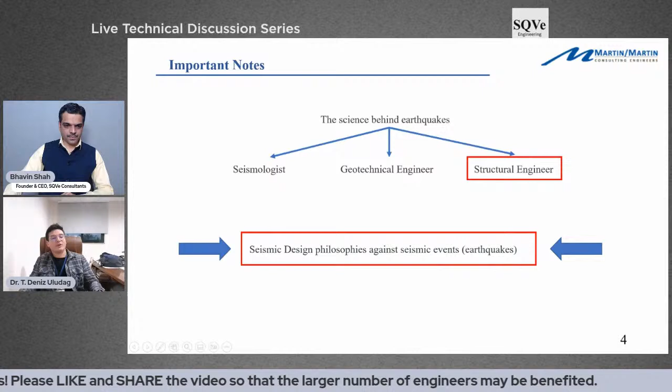And let's jump to important notes. I would like to mention that the science behind earthquakes is an ocean. It's not just one professional area. There are seismologists, geotechnical engineers, and structural engineers. Today we will focus on the structural engineering part, so we will discuss seismic design philosophies against seismic events. I can answer your questions briefly on seismology or geotechnical stuff, but I highly recommend asking questions on the superstructure above the ground. And that was the first important note.

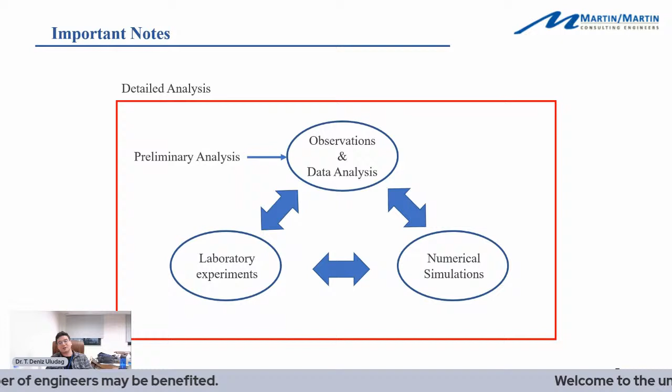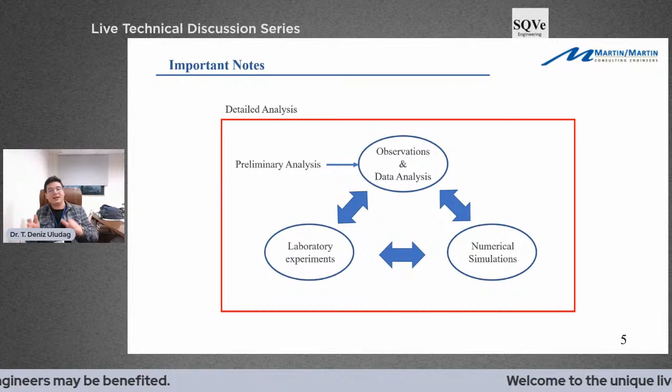And then the second one, we will discuss some collapses and damaged buildings here. But please do not forget that this is preliminary analysis. What I mean by preliminary analysis is these are based on observations, which might be based on images, videos, and pictures, or on what we observed in the field. But it's not the concrete outcome or concrete fact. So these comments might not be considered as a final conclusion.

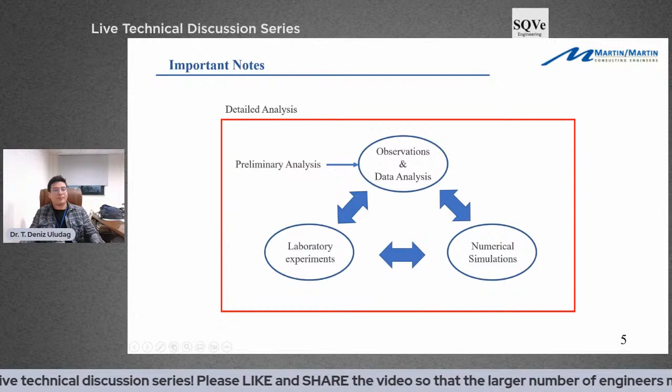So that's why I put the schema here. The final conclusion about what was wrong and what happened there will be provided after the detailed analysis. So again, today we will just talk about preliminary analysis. You can think of it as initial thoughts.

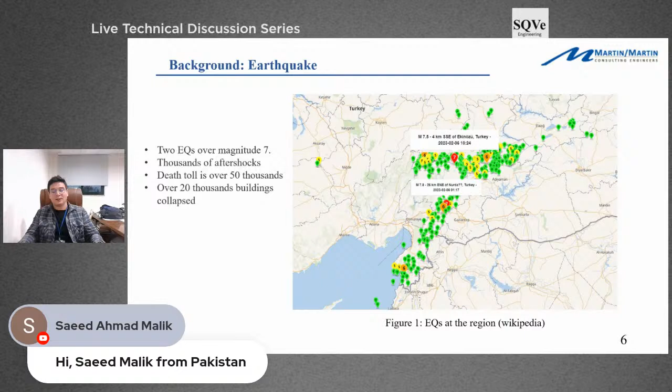So then let's start with the background. Our reconnaissance team stayed in Adana. You can see Adana here. And then we traveled every day to the affected regions in Turkey. We visited around 6 cities, not all of them, but tried to visit the most damaged ones.

So, brief information about what happened there in the region. Two earthquakes over magnitude 7, so this is huge, and then thousands of aftershocks. You can see the green dots, and if you zoom in that data, you can find more and more aftershocks. The total death toll is over 50,000. Over 20,000 buildings collapsed, but with the damaged and demolished ones, the number will probably be over 200,000. So it's a big disaster there.

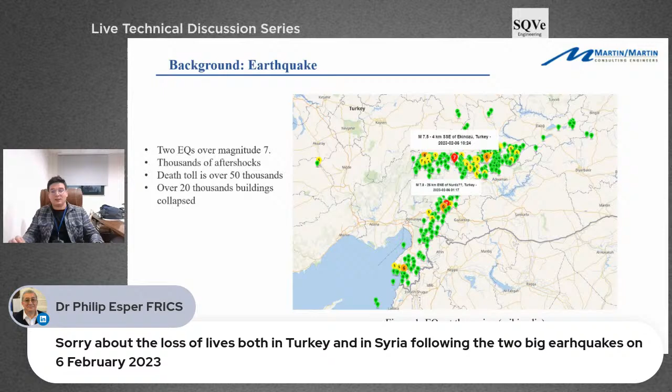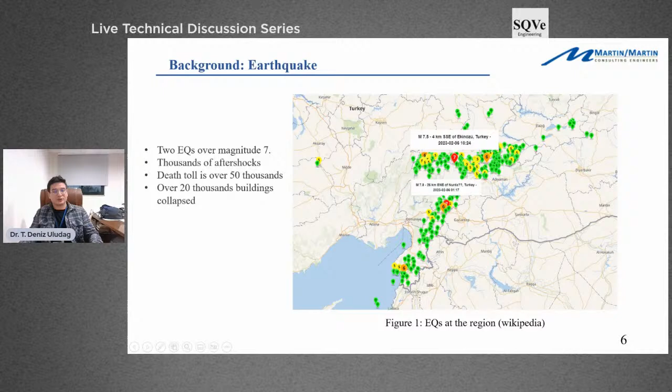Our reconnaissance team from the United States and Taiwan, five people, was there. We investigated many of those cities, and I can say that for Antakya, this region, maybe 80-90% of the city was destroyed. So this is really big devastation here.

When we talk about our observations, please also note that we cannot generalize those collapses across every city. Every city has different conditions. There are loose soil ones, where you can see liquefaction collapses, and that's why, even in the preliminary analysis, we cannot say this happened all over the 10 cities. Just the beginning note.

When I say two earthquakes over magnitude 7, we don't use these magnitudes when we design structures. We don't say, okay, let's design this structure for magnitude 8, magnitude 7, or magnitude 6. This term is just to explain the energy released. So you can make an analogy between the magnitude and the energy released.

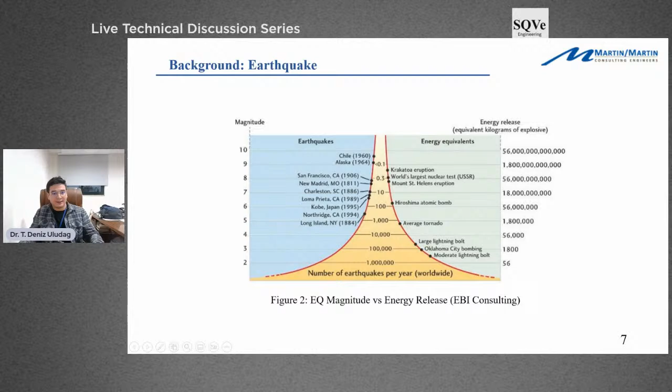One of them was around 7.7, 7.8. You can see the energy released from that earthquake. And you can see 6.1, 6.2 is equal to the Hiroshima atomic bomb. So we are talking about huge energy released here. But again, we don't design buildings based on magnitude 7, magnitude 5, or any magnitude. This is just a term to explain how much energy is released from the earthquake.

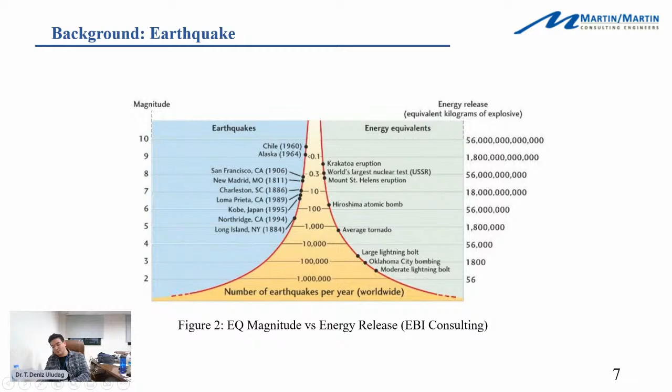Displacement. When you check PGV, peak ground velocity, we obtained really high peak ground velocity in some of the regions. So this is a really important earthquake based on high PGV, and I can say maybe high vertical acceleration too.

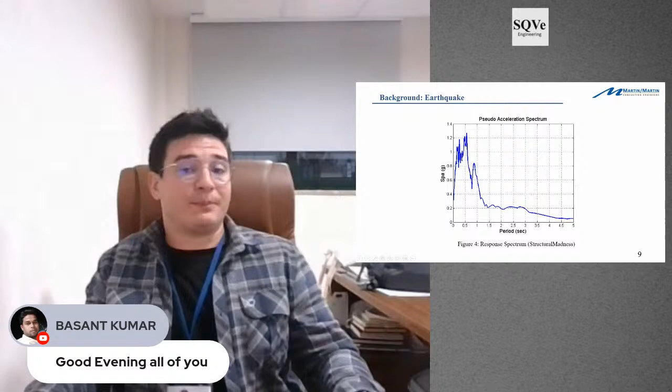We got this data from one station, and then we transform it to a pseudo acceleration response spectrum. Why do we transfer this ground motion data to a response spectrum? Because this shows us the response of a single degree of freedom system. Based on this, we can talk about the acceleration we will obtain in the building, so that we can calculate the inertial forces.

But this is data from one station to one response spectrum. So how do we determine it? When we design structures with linear design, of course, when we use the code, there are other designs too.

For example, one of the other big parameters is the soil. When the soil condition changes, this design spectrum also changes a lot. So that's why in the code, ASCE or the Turkish code, like the 2018 Turkish Seismic Code, you can find different design spectra for a similar region based on the soil class.

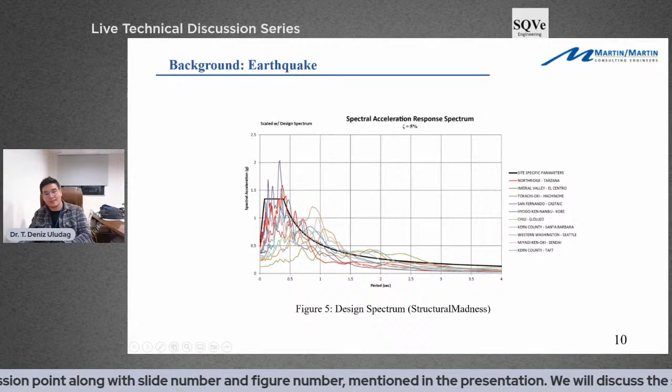And then once you have this black solid line, which is based on the data, in the seismic codes, ASCE or the Turkish code, you just get this black solid line, and then based on the period of your building, you pick the design acceleration. And this was the seismology part and the ground motion part.

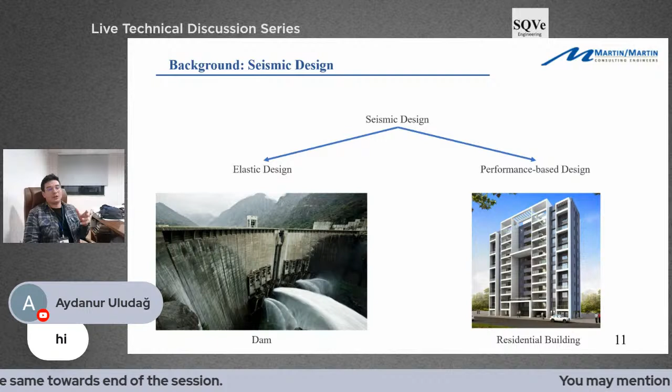But now we will talk about, when we get this design acceleration, how we use it, how we design, or what the options are for the seismic design philosophies. So basically, I categorize them here into two options. You can see elastic design and performance-based design.

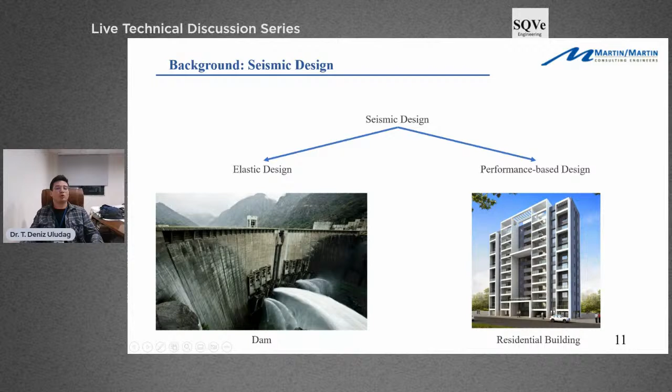When we say elastic design, it's the linear design, and all the structural components are still in the elastic behavior. Mostly we see elastic design in dams, for example. But when we go to residential buildings, we prefer performance-based design. What is the big difference between them?

Of course, the main difference is the cost, right? When I say cost, don't think that we don't spend money to save lives or don't sacrifice money for it. That's a different issue. We are talking about huge money here, and with performance-based design, people are still safe. We will talk about what the design philosophy is. I will explain it with an analogy as well.

But the main difference between them is the cost, and also the return time. Most of the time, when we design residential buildings, the return period is 50 years. We give the buildings a lifetime of 50 years. And when we design buildings to be elastic, it's much longer.

In order to understand performance-based design, we need to understand the terms brittle and ductile. We have different construction materials, for example concrete and steel. Concrete is a brittle element, and steel is ductile. The big difference between them is significant plastic deformation. Ductile elements can exhibit significant plastic deformation, but for brittle elements like concrete, plastic deformation is very low.

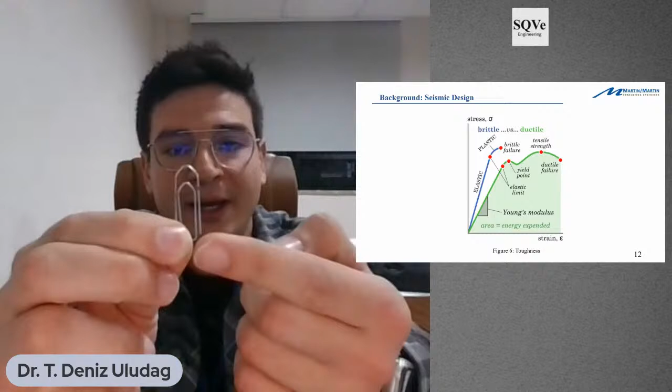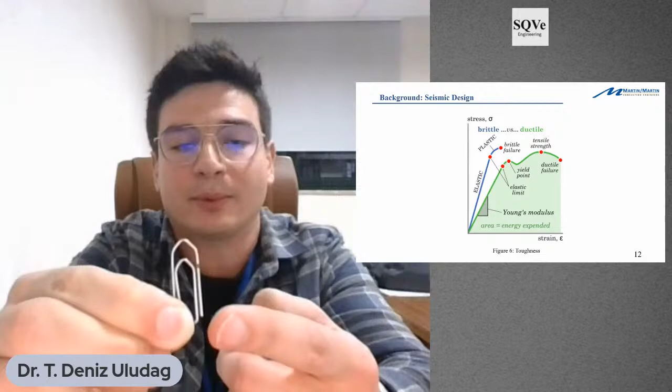It might be hard to understand for some people. So when we say elastic and plastic, let me show you a quick demonstration here. Now I will apply some loads on it. You can see I'm pulling it, and when I release my load, it goes back to its original shape. This is called elastic.

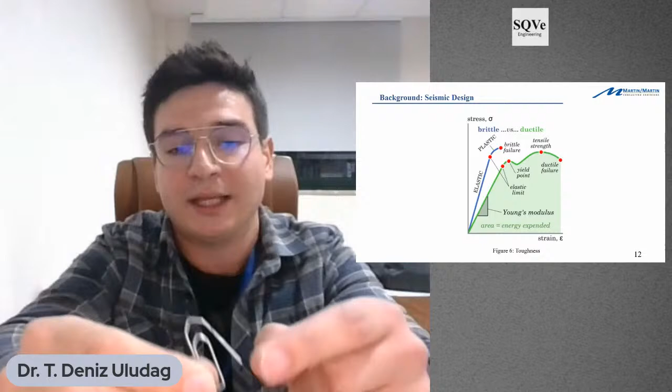But what if I increase the load I apply? If I keep increasing the load, and then release my finger, it doesn't go back to its original shape. The difference is called plastic deformation. When any material goes into plastic deformation, it dissipates energy. You can see the green area here is the energy dissipated by the ductile element. We call it the energy dissipated area, or toughness.

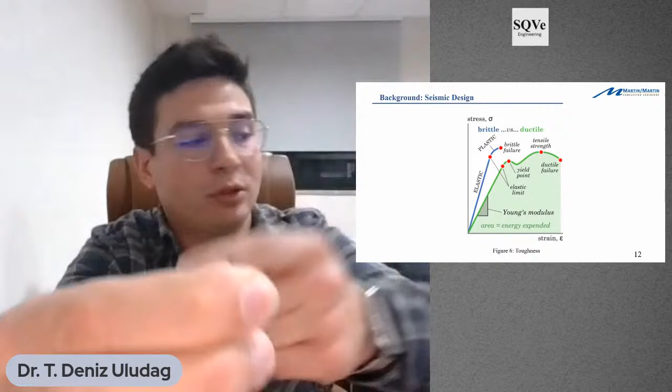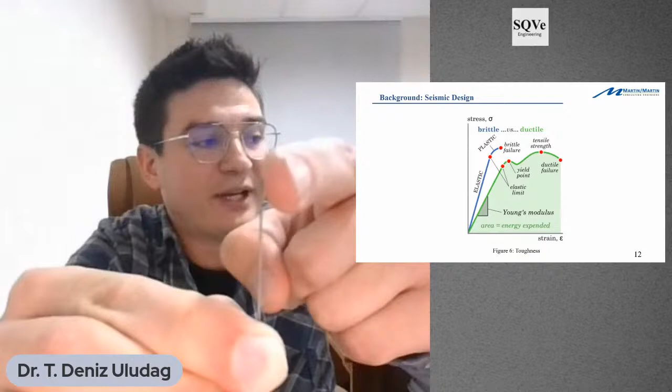But if we check a brittle element, if we zoom the camera in here, this is a brittle element. If I apply force, you can see it's deforming, and when I apply a little bit more, it just breaks. When I apply a little load, it deforms and comes back, but if I apply more load beyond its elastic capacity, it just breaks easily. You cannot see that plastic deformation here. That's the difference between concrete and rebar.

That's why for performance-based design, we highly prefer ductile materials. That's why we use reinforced concrete instead of plain concrete. We provide rebar inside the concrete.

That's the idea between brittle and ductile. And then when we design buildings with the performance-based design that we said, if we use ductile elements and they exhibit ductile behavior, instead of designing at the force level here, the elastic structure, we can decrease it to a minimum design force. You can see here, we can design the buildings at this level.

Small interruption. We are not able to see your cursor. I think you might have to move into the other screen. Okay. Sorry. Now we can see it.

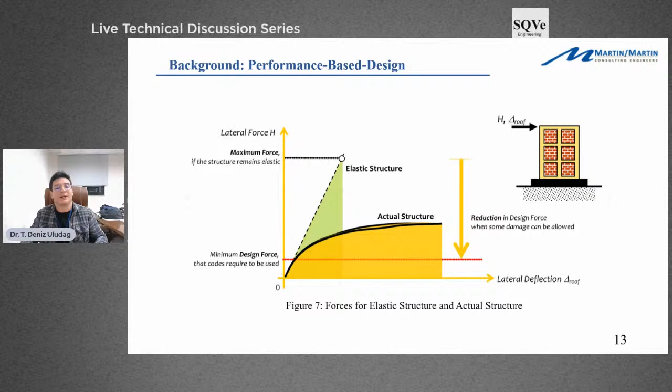Right. Okay. So you can see here the maximum force for the elastic design, right? Once we use the performance-based design, we can reduce this load from here to here. There is a huge difference, huge reduction here. But of course, this comes with some other disadvantages. We will talk about it. But using ductile elements allows us to provide this reduction.

So basically, when we talk about performance-based design, let's talk about the lateral seismic force here. You can see this is the force that we consider elastically, and then with the R value. This R value is a parameter of lots of things: is it a moment resisting frame or shear wall system, a concrete building, steel building, timber, masonry, whatever you use? There are lots of parameters to determine this R, but basically based on your system, you pick your R value and decrease the elastic load to the design load. So we design the buildings basically with the reduced earthquake loads.

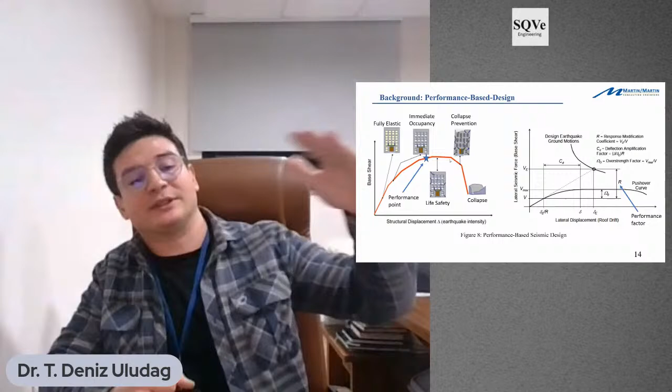But of course, in performance-based design, we don't design the buildings to collapse, right? We design the buildings at the performance point. The worst case, it will go to collapse prevention. So the idea of performance-based design is surviving the main shock and then quickly leaving the building. We are not talking about small earthquakes, but a high magnitude earthquake that causes higher acceleration than the design level. Then the building can go to damage here, but still it shouldn't collapse. It can be damaged, but it should stand after the first main shock. The idea again: survive the first main shock and then leave the building.

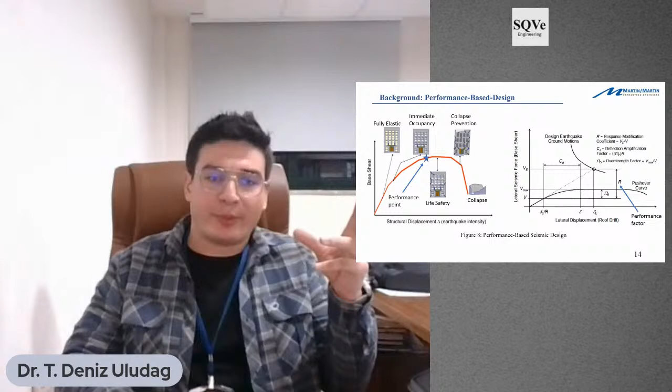This might seem complicated, because you might think, why do we design buildings to be damaged, why don't we design them elastically? If you design them in the elastic region, they will stay fully elastic, like the dams that we see. But the problem with that is the cost. I will explain that with an analogy after I demonstrate the building components. So let's quickly check the building components, what life safety or immediate occupancy levels are and what kind of elements get damaged. And then I will show one more analogy to explain performance-based design better.

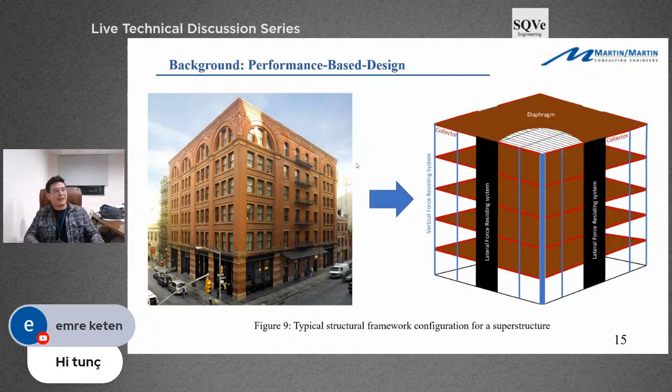So you can see here, this is what people see from the outside. This is what structural engineers see: the components, vertical force resisting system, lateral force resisting system, diaphragm, and the collector elements. Let's look more into the components. We have diaphragms at every level, and we design them to remain elastic in performance-based design. And then we have the gravity system, the columns. We design them to remain elastic after a high seismic event. We are talking about high seismic events here, not low seismic events.

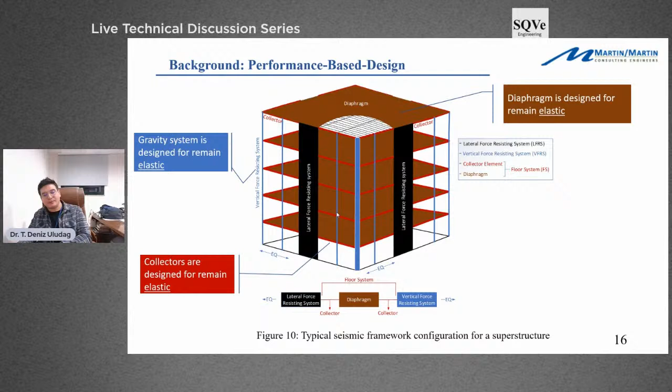And then we have collector elements. You can see here, we also designed them to remain elastic. However, you can see the lateral force resisting system here. That might be shear wall, we will talk about it, or that might be moment resisting frame. But we designed them for significant inelastic deformation.

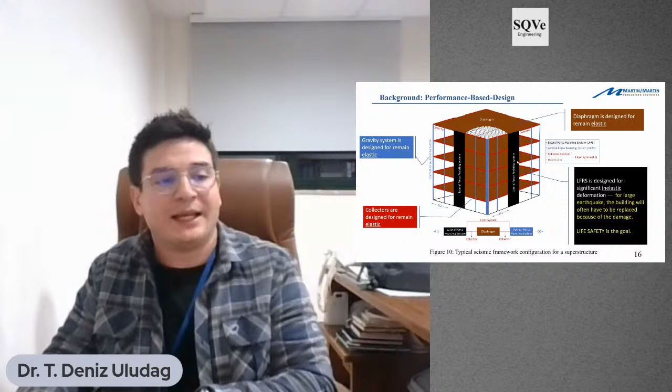Inelastic is also a similar thing to plastic. So significant plastic deformation to absorb the earthquake energy. But when I say absorb earthquake energy, not on the ground, absorb the earthquake energy on the building. Of course, after a large earthquake, the building will often have to be replaced because of the damage. And here, again, the goal is life safety.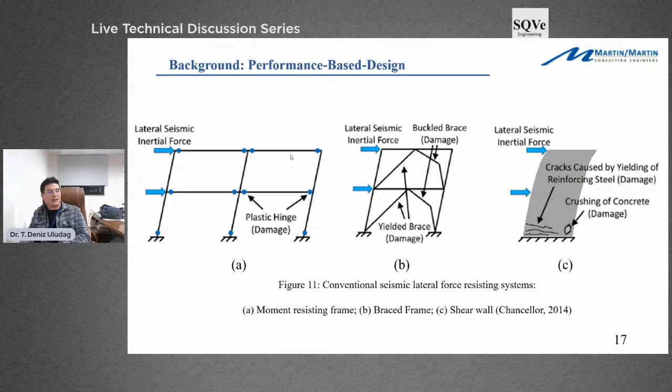So when you buy a car, or when people sell a car, there's a possibility you can have an accident one day. People can crash. Some collision impact energy can go inside the car. But just because of that, we don't drive tanks around on the streets, right? So that's one analogy to understand the cost difference between elastic design and performance-based design.

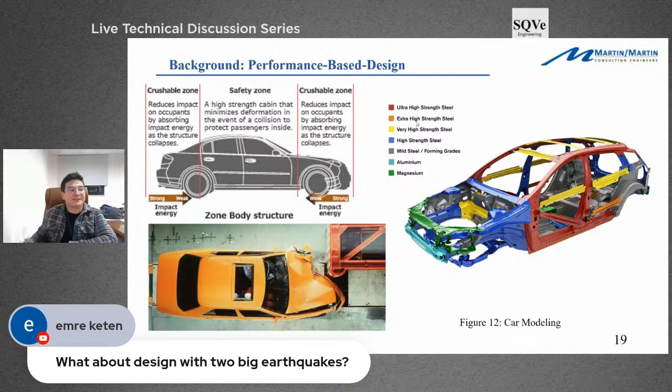Why is it sacrificed? To dissipate the collision impact energy coming to the car. Somehow you should dissipate that energy. So they use different levels of steel. Ultra high strength steel is more brittle than very high strength steel or high strength steel. When you use high strength steel here, you can dissipate the collision energy, while the safety zone where the people are is still standing and safe. So basically you sacrifice one part to protect the other. This is the similar idea with

performance-based design. But if you go to elastic design again, think about Tesla's Cybertruck. Why is its shape not like the sports cars? Because it's not easy to process ultra high strength steel. You cannot come up with a sports car using ultra high strength steel with today's technology. It's not easy to bend it, and check the cost also. So that's the idea between elastic design and performance-based design.

But the people are safe. Again, in performance-based design, the main goal is life safety. So we sacrifice some of the structural components, or in car design, they sacrifice one part to dissipate the earthquake energy, and then they save the main zone. And then you can come up with a lot cheaper structures, maybe 10 times cheaper.

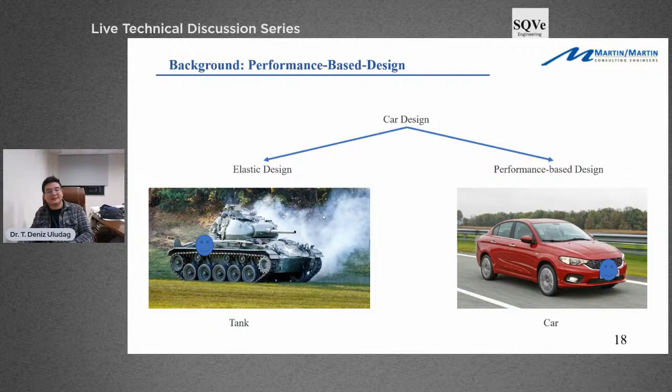So again, think about it. Do you want to drive a tank because there's a possibility you can make an accident one day? That's why we design buildings elastically... sorry, in performance-based design, we don't design them elastically. But why do we design them elastically sometimes? Because there is an importance factor. That's another discussion.

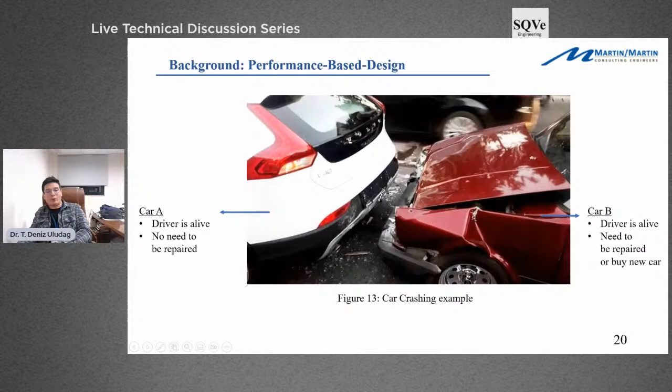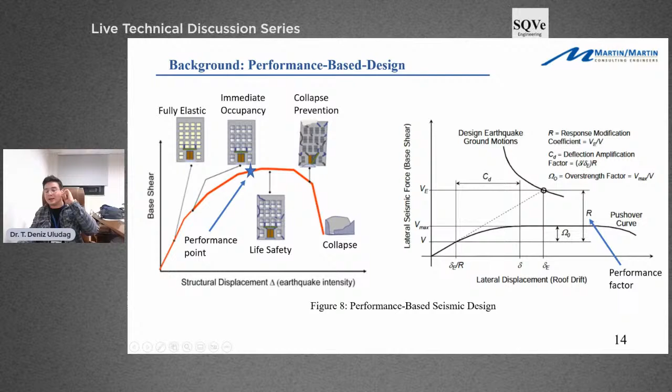I'd like to mention briefly that we talked about performance-based design and sacrificing some structural components. But when this happens, what are we going to do? Are we going to demolish the building if it's damaged at the life safety level or collapse prevention level, with severe damage to columns and girders? Are you going to demolish the building and rebuild it, or can we come up with an idea to repair it, like cars? When you crash your car, you can go to a repair shop and get it repaired maybe. So can we use a similar idea?

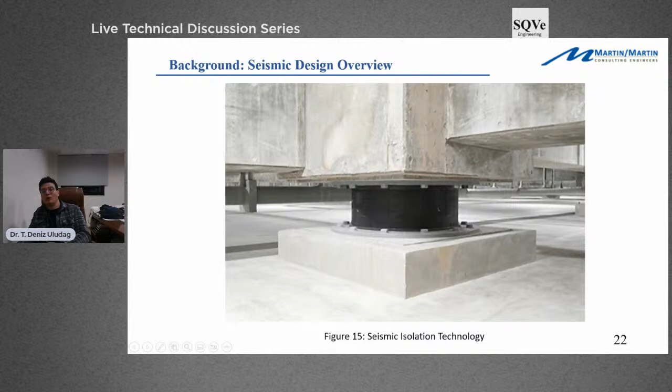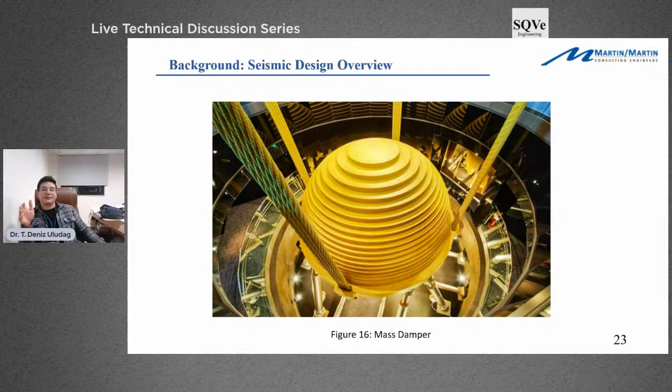Yes, that's why there are passive energy dissipation devices. By using those devices, you can localize the damage and then basically repair those devices after the earthquake. This isn't the only idea. There's other stuff too, like seismic isolation technology, but that's not a similar working mechanism. This is to dissipate the earthquake energy and reduce it, and there are other devices too, like mass dampers, used in Taipei 101. Again, there are others, other seismic devices to provide better and more economical solutions to building design.

But here the question is: do you want a design with low fee in the first place, or low fee when the earthquake happens? So basically, let's say you have those passive dissipation devices. After the earthquake, you don't need to demolish the building. This is the second cost after the earthquake, not the first cost. The first cost of buying these devices will be more costly. But when you have those after the earthquake, the damage cost will be a lot cheaper. Instead of demolishing the building, you can just repair it, like instead of buying a new car, you can just repair this car, of course if the engine is safe.

So this was the brief background about elastic design, what the magnitude was, how we got the ground motion data, how we got the design spectrum, and if you have questions we can dig into more of those.

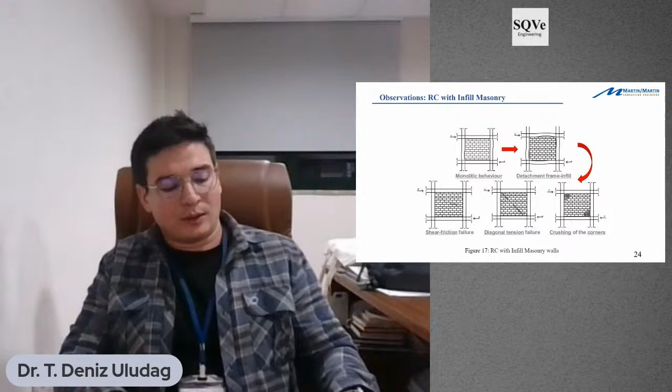Now let's check the observations that we got in the field. Mostly what I saw and what we investigated is that the buildings are mainly reinforced concrete buildings with infill masonry. When you walk around any city, you can basically see cracks, those kinds of cracks you can see here, diagonal cracks in two-way, in most of the buildings. So the question is, why do we have those cracks?

Why did we get those cracks? Because when structural engineers design these systems, as you can see here, we have the frame. Let's say this is a column, and we have columns and beams here. When they design this building, they don't provide any gap. So if there's no gap, think about these partition walls here, their demand, their capacity versus the columns here. So when an earthquake happens, these columns get drift.

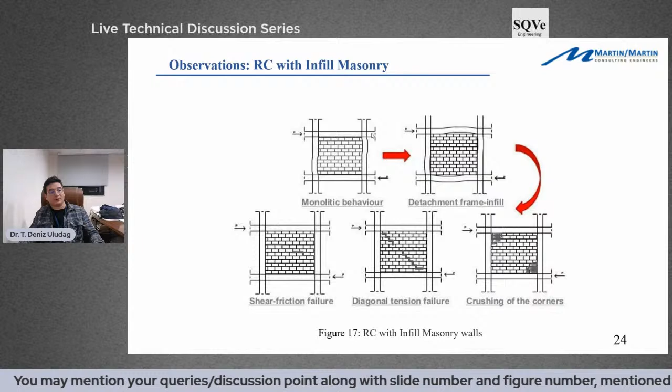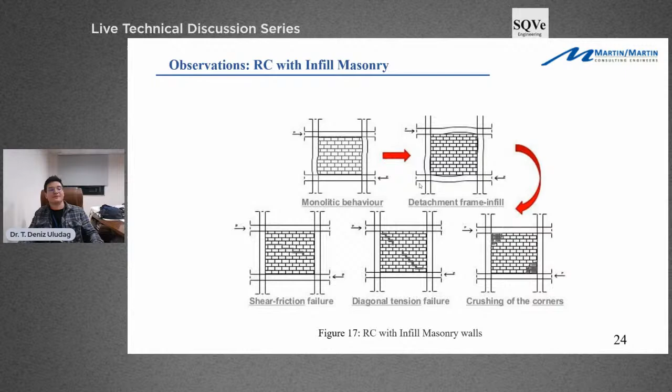But they're designed to resist some drifts. But how about those partition walls? When they get those drifts, they start cracking directly because their capacity is not enough for that. They don't have sufficient capacity to exhibit some drifts. So this is the explanation, and what I see at the field...

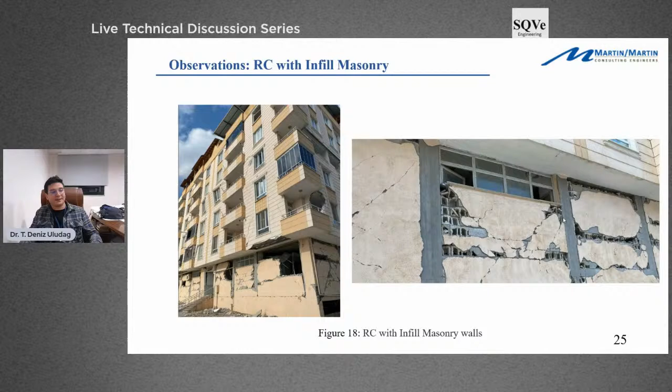I'm trying to provide a little examples from every discussion, but we will provide detailed information in our report. So you can see here, we have one building. On the left is the building. It's damaged, you can clearly see with your eyes, right? And then when you check the right side here, you can see those diagonals clearly. So that's from the region affected in the earthquake.

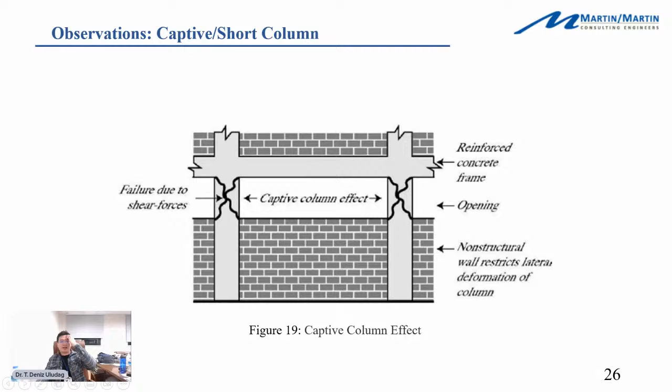And then the other issue that I realized is the captive short columns. This has also been one of the big discussions for decades. So when you have openings and infill walls, these openings might be like a window. And then when you have a window on one side, you can see here there is a window, and the bottom part is like infill wall. So the openings might be a window or a door or anything that provides openings there. And then we have reinforced concrete frame, you can see, right? So most of the time you can see those cracks where we have openings, but also you can see like a cut, direct shear failure.

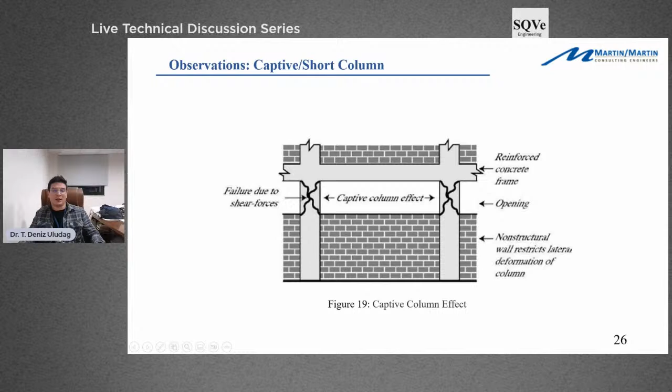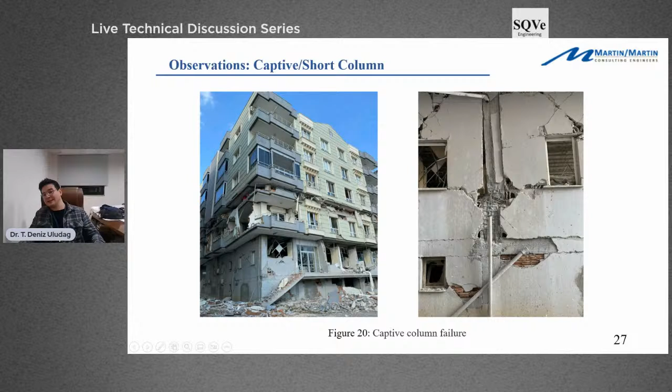So when I was in the field, this is one of the examples. You can see the full building here, and on the right picture you can see we have windows here, so we have openings. These are the openings, and the bottom part is a continuous infill partition wall. And because of that, this provides a short column effect, and because of the shear forces, you can see the cutoff here clearly. So this is one of the other issues.

And then the other one, plastic hinges. When we say plastic hinge, this is actually what we want to see instead of collapses, instead of shear failures like that. What we want to see is the plastic hinges. Why do we want to see plastic hinges? Because when you see a plastic hinge, it means that in the hinge part, the structural element goes to plastic deformation. So plastic hinge, you can make a connection with plastic deformation. So when we have plastic deformation, what we get is huge energy dissipation, right? That's basically what we designed the building for, performance-based design, to get those plastic hinges.

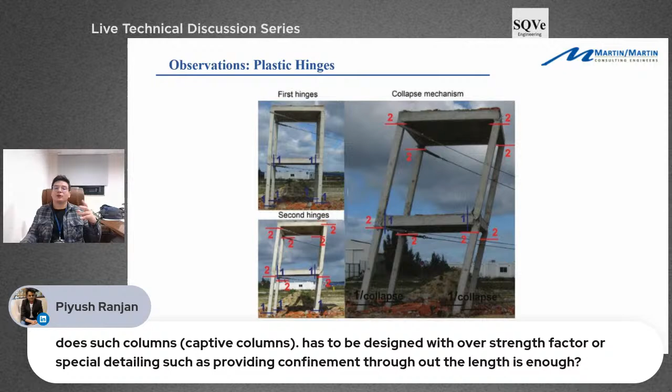This is kind of providing what's called a sway mechanism. There are other ways to get those plastic hinges as well, but this one is called the sway mechanism. And if it keeps getting more and more, at one point it will collapse. So this is basically the collapse mechanism or sway mechanism, but we don't want it to collapse. What we want to see is when the earthquake happens, the main shock, we want this building to stand with those plastic hinges by dissipating the earthquake energy, and after that the building should be left standing.

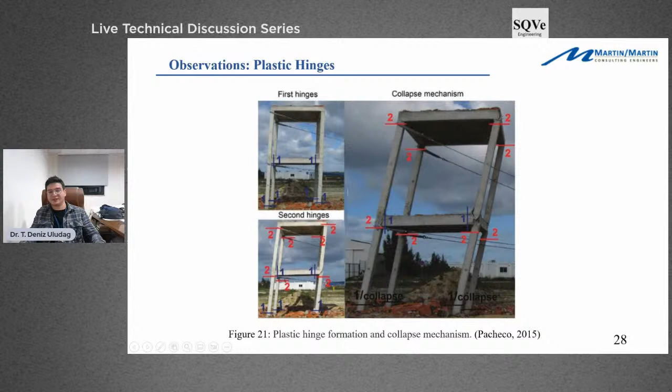Anyways, let's see the observations that we got in the field. You can see the building on the left. So what we got here is a plastic hinge in the beams, in the girders. That's what we kind of want, because we don't want the plastic hinges to come up in the column first. So this is kind of good, and as you can see, the building is still standing after 2...

I say you can argue with this, but I say 2 main shocks, with magnitudes 7.8 and 7.5. So you can see the building here. After 2 main shocks and lots of aftershocks, like thousands of aftershocks, it's still standing, and you can see the plastic hinge here. So when you see this building, there's lots of cracks here, and that damage here. But this is kind of good design, because this building was designed for this.

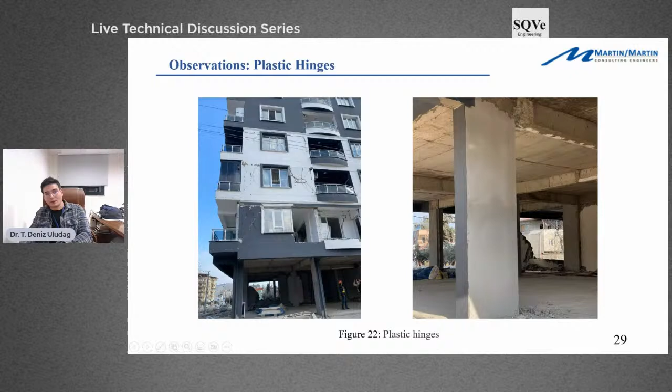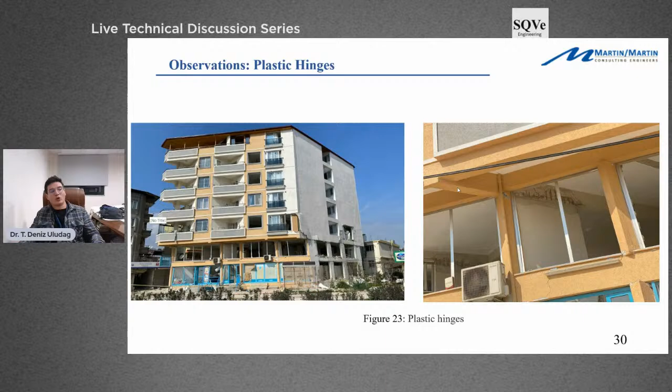And then if we check other plastic hinges, for example this one - again a mid-rise building - when we investigate it, we obtain those damages not on the beams, but right on the columns. This is something we don't want, compared to the other one where you can see plastic hinges not on the columns.

But when you investigate some other bridges, for example this one, you can see the plastic hinge is not at the base, it's in the middle. So this is kind of a big question mark. It's not easy to answer this question - it's interesting that the hinge is in the middle. The question is why.

To answer that question, you need more detailed drawings and stuff, like what are the longitudinal rebars at this position, at the middle and at the base. So we need to see all of those.

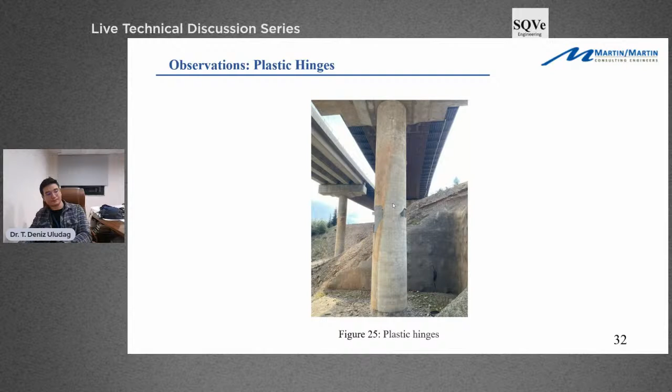And then the one other thing that we obtain is liquefaction - basically we saw lots of examples of it. Now the figures might seem complex, but how can you understand what is basically liquefied soil? We have two options - not just two, but we can say one is stable soil, you can see here stable soil, and then the other is liquefied soil.

So what is the difference between them? This one is stable, but this one, briefly, we can say the soil flows like a liquid. That's the difference, and that's why you can see settlements and this kind of damage.

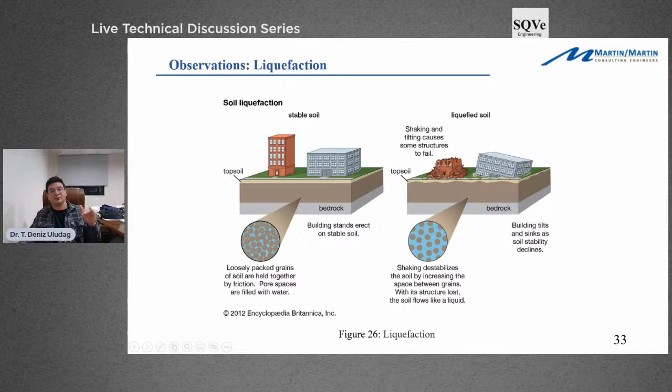And when we check the area, you can see the settlement here - this is from Robert Dowell from California State University - and then you can see the settlement, it's huge. There are buildings close to this region. So what can this do?

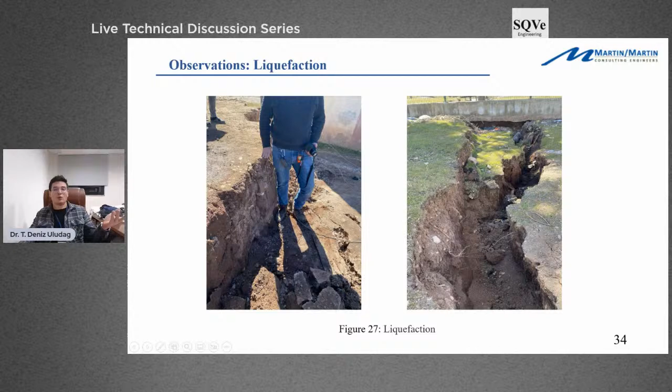It can cause a settlement like this. But when I say settlement, don't think like the Pisa Tower in Italy - that's a slow settlement. We are talking about, compared to that, an immediate settlement. But the building is just slowly falling down.

When we investigated this building from other sides too, with the pictures and everything we have, it has a low impact on the building that it's standing. So that's why it might be, not easily, but as a preliminary comment, that it's just

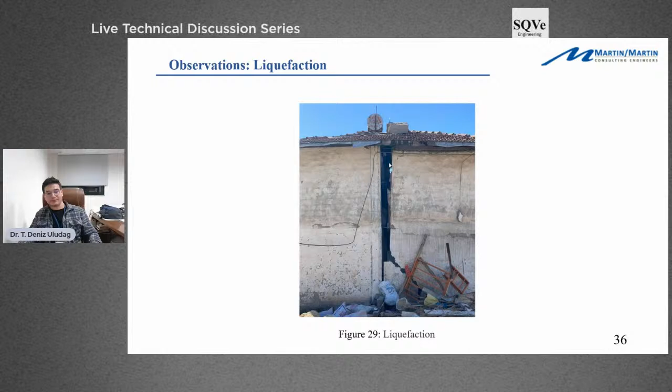a settlement issue. And then we also obtained one building split into two parts. You can see here why we got this - because two sides of the building settled, but however this region was standing. So that's why the building split into two parts. We also obtained liquefaction issues there.

And then the other issue is the soft story - this is also one of the common failures that we saw. Soft story might occur, and mainly we saw it in the first floors. Why do we see that?

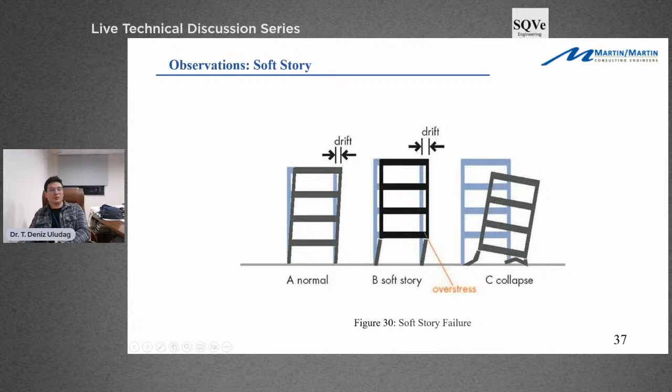And then when we were investigating, we realized how you can understand whether one building is designed before 2000 or after 2000, right? Because the seismic code in every country, year by year, is evolving, right? It's not constant. 50 years ago, people were using different seismic codes, seismic provisions, and now different. So that's why one building might be designed with the old provision, and the new one probably designed with the latest provision, right? So when we check the buildings, you can see those rebars.

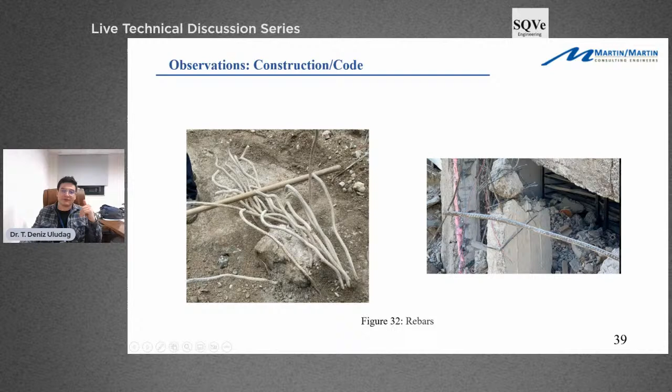So when we see rebars like that in the field, we understand this building is definitely designed or built before 2000. And when we check the evolution of the Turkish seismic code, you can see this one until 2000, and then the other ones come in 2007 and 2018. The 2018 code provision, I guess, is well defined, and again, it's not perfect. None of them is perfect. Every time they are open to more improvement. They should be evaluated and developed more. More studies should be conducted.

But if the structural engineers design the building using the latest code versus the code from the 1950s, that will be a huge difference, right? So that's why, if we go back to our performance-based design discussion, when we design those buildings with the performance-based design idea, there is a lifetime for that, right? You shouldn't forget. And one of the main observations I can say is that seismic retrofitting is really important.

How can I understand that? Because in one of the regions we visited, all the schools were seismically retrofitted about 2 years ago, and on none of them can you even see moderate damage. So seismic retrofitting is really important in the world, not just in Turkey. Lots of places, for example California, the San Francisco region, right? There are new buildings you can say are perfectly designed, but how about the old ones? They were designed with the old provisions. So those ones should definitely be retrofitted.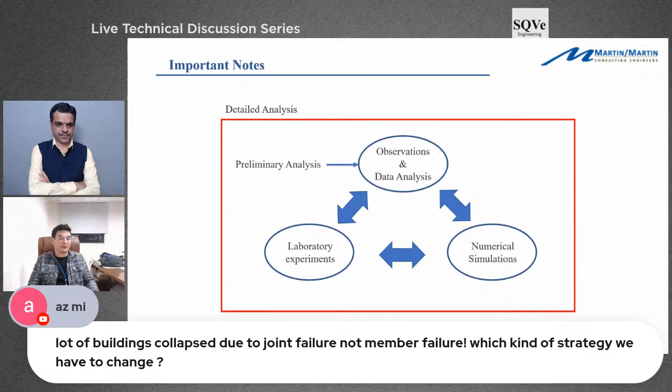We are talking about over 20,000 buildings collapsed, right? And then the total number for demolition will be maybe over 200,000. So there are lots of failures, lots of collapses, and lots of damaged buildings. So we cannot say it's joint failure only or member failure only. So what about this building? Is it joint failure or member failure?

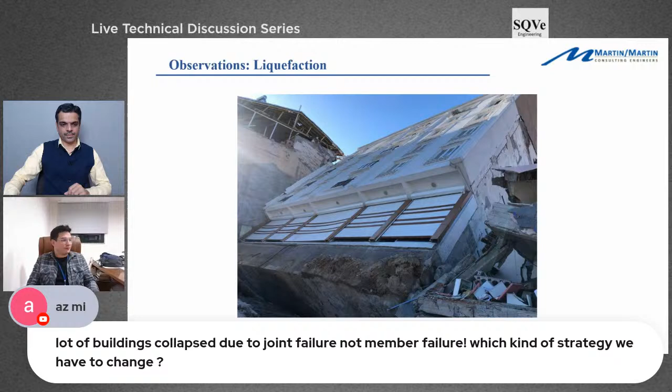This one, you can see even the glasses are still standing. Not even a break on the glasses, right? So that's why I cannot say it was joint failure only or member failure only. Nobody can say that at this point, right? We need detailed analysis. But as a preliminary or initial thought, we can say that there is a little bit of everything. That's my initial thought.

I hope he's satisfied with the answer. And then this is the other question. I can't hear you, Bhavin.

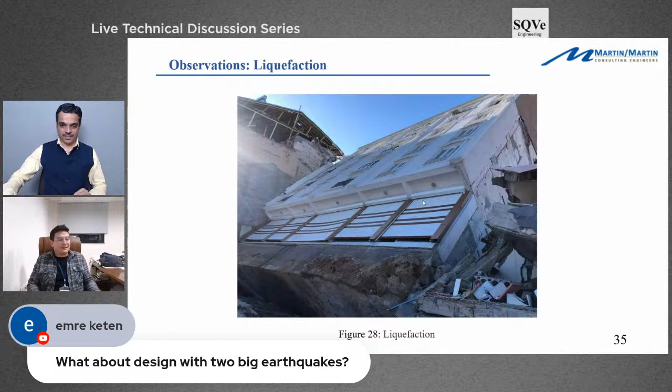Yeah, this is an interesting question. What about design with two big earthquakes? This is a great question. Thank you, Emre Keten. I think he meant sequential earthquakes. So when you check any seismic code in the world, there is no designing for the sequence of earthquakes, I guess.

So one of the most important things anywhere in the world: people should leave those buildings and they shouldn't go back, because damaged buildings might even collapse. Recently a magnitude 6.4 happened, not 7.5, and even 6.4 caused collapses in some of the weakened, softened buildings. So if the building is designed using the performance-based design philosophy, it should survive the first main shock and then people leave the building.

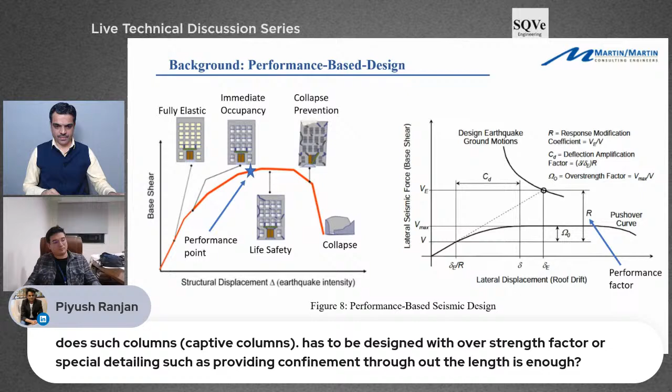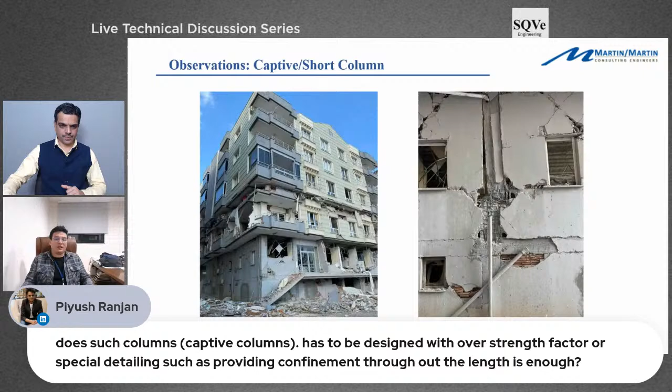Yes. Okay, next question is for the short column: whether it has to be designed with an overstrength factor, or whether special detailing, such as providing confinement throughout the length, is enough. Yeah, good question. To answer this question, I cannot say they should be designed like that or follow any instruction here or there, but I can just tell my recommendation. A gap between those frames might be provided. If the gap is provided, you will not create this captive column effect.

But again, if you don't want to provide a gap, I don't think there is one solution here. Then not overstrength, but definitely special detailing to provide shear capacity there, to protect the columns from this effect.

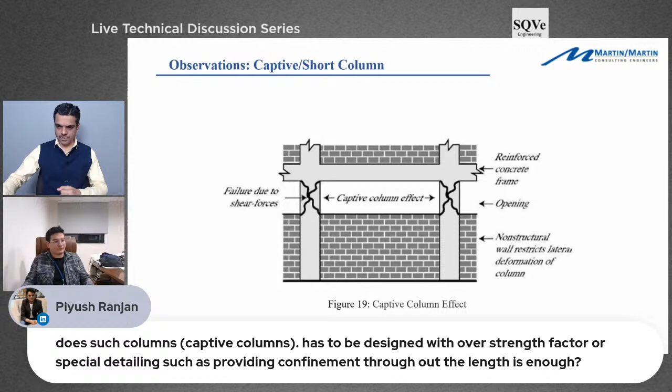Yes. Okay, so thanks for the excellent presentation, Dr. Deniz. And as engineers, I think we should use these three parameters more wisely: cost, design, and construction.

Okay, next point is why third mode torsion is important for seismic design. Right, good question. This is a long discussion, because we don't have an example and explanation on this one. But why is it important? Basically, torsion causes extra forces on the two sides of the building, and some elements when we design them, for example shear walls, are strong in the in-plane direction and weak in the out-of-plane direction, so it causes a big problem there. But this is a very brief explanation; again, it's a long discussion. Yeah.

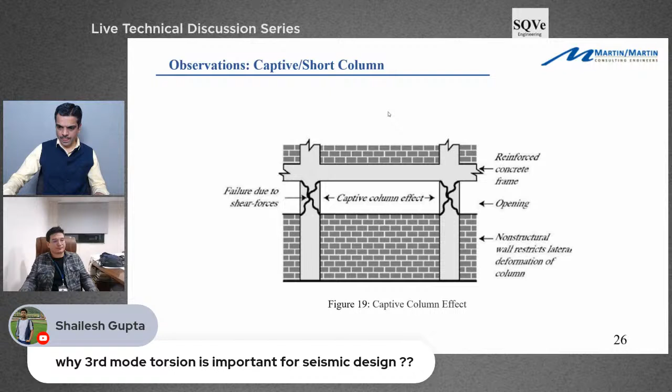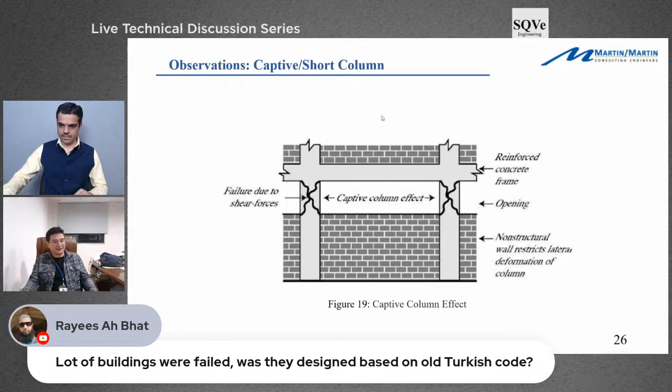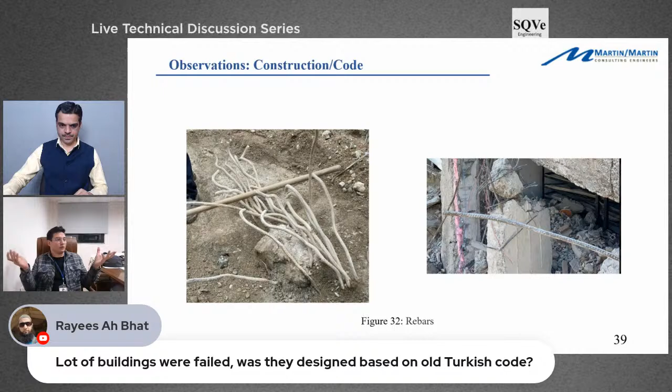Okay, so a lot of buildings failed. Were they designed based on the old Turkish code? That's a good question. My answer will be a preliminary one. Based on what we see, based on the rebars that we see, like the smooth ones that I explained, I think my answer is yes. Most of the buildings that collapsed were designed based on the old Turkish code. But again, when they were built, there wasn't a new code, right? So that was the code at the time. Yes.

Whether any PGA at any particular location exceeded what is prescribed in codes or zone classification? That's a great question. So he means the PGA. But the point here is we don't design with the PGA, right? We use the design spectrum, and we compare the design spectrum with the response spectrum that we got from the recorded data in the stations. There is a little bit of difference between PGA and the response spectrum, and my answer is in one region, compared to the design, I think they obtained almost double.

Okay, one more question. Which type of failure was observed most out of the following: soft story, liquefaction, lack of ductility? That's a great question. Well, all of them. Lack of ductility is also one of the big issues. He means not sufficient rebar in the concrete, so that they can fail like a brittle failure.

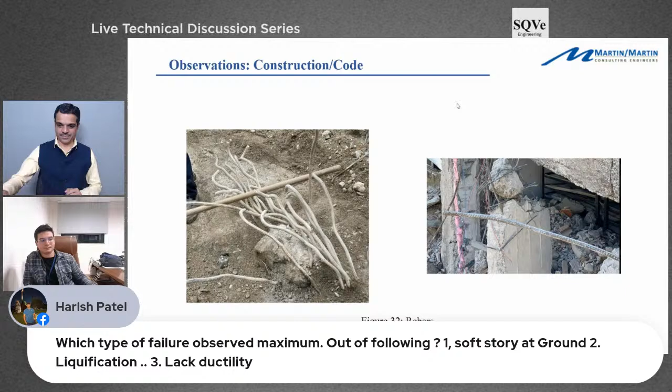From snaps from the site, we could observe that amongst a group of structures which were identical, some buildings were standing, but some buildings collapsed. So what could be wrong in the failed ones? Any preliminary thoughts on this? Oh, that's a good question. But again, same design for all those buildings, right? How can we say that? Do we have the drawings of the buildings? I don't have drawings, so I need to get the drawings. Once we get the drawings, then you need to get specimens and test them. You need to check if the concrete strength is matching, if the rebar number is matching. After we answer those questions, then we can talk about this. Right.

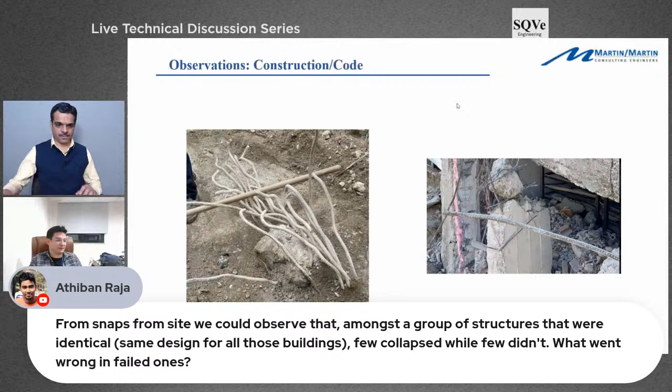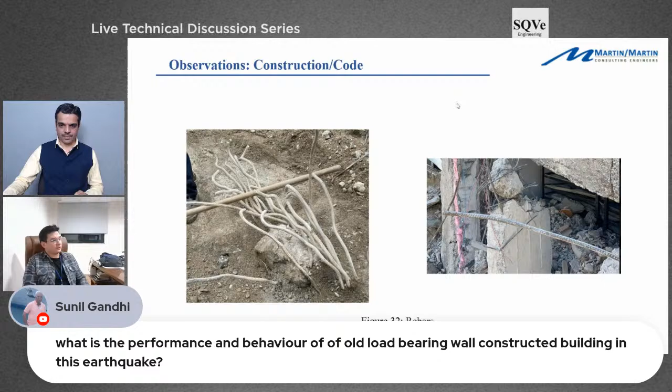What is the performance and behavior of old load-bearing wall buildings in this earthquake? That's a great question. We visited several mosques, churches, synagogues. Those are old masonry structures, and there are churches 700 years old, and they were also damaged. Again, the earthquake was really terrifying. It's a big earthquake. Two big ones happened, 9 hours apart. Lots of aftershocks.

So even those old load-bearing ones, most of them are brittle. They don't have reinforcement inside. Their performance was kind of questionable, but of course they are not 10 stories, right? A church is not like a 10-story, mid-rise building. But again, we observed some churches, synagogues, and mosques also damaged or collapsed. Right.